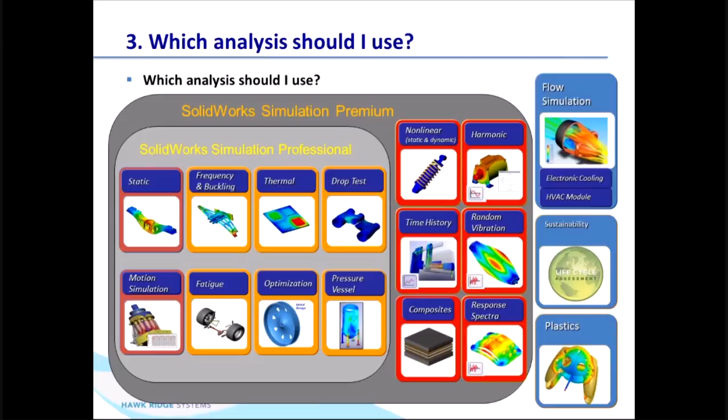You saw Simulation Professional that has all these tools like static and thermal drop test, or we can go into flow simulation and look at CFD. But really, the bottom line is there's a lot of different tools available to you, but oftentimes you're not really sure which analysis you actually want to run, right? Do I want to run a static analysis, maybe a nonlinear analysis? How do I choose? Well, we've already figured out what our end goal is. We've already figured out what outputs we need, if it's stress or displacement.

Should I use a linear versus a nonlinear analysis? Well, looking at the difference between the two, do you have a nonlinear stress strain curve? Is contact a big issue? During your loading condition, is contact going to be a problem? Are you seeing large deflections? Answering these types of questions is going to let you know, do I run a linear analysis or do I need to run a nonlinear analysis? Most oftentimes, you probably want to run both just to see.

If you want to run a nonlinear analysis, what we often suggest is start with a linear analysis first. And then once you've gotten your feet wet with a linear analysis and you've looked at the answers and they look about what you'd expect, then you can move on to a nonlinear analysis.

Maybe you're stuck between, is it static? Is it dynamic? Well, we often ask the question, does the speed of the loading matter? Are you loading it really, really fast where you have these inertial effects involved, or can you assume that you load it really slowly and you don't need to worry about inertial effects? Are you looking for the response of the structure, or are you just looking for that equilibrium final stress or displacement?

For a lot of our electronics cooling customers, they often ask us, should I use our flow tool or should I use the Sim Professional thermal module? That's always a question that gets asked. And what I pose to them is, do you know your convection coefficients? Is the fluid flow around your model going to be of a big concern? If you're not really sure what's happening there, or maybe you don't know the convection coefficients, then maybe you should do a flow analysis. If you do know those, and maybe you're working in an environment, say a vacuum, and there's not really any fluid there, maybe thermal would work better for your case.

So the fourth question that we ask when we're planning an analysis is, what model should I use? And this is a question that I'm surprised not as many customers ask, because it seems like a really simple question, right? What model should I use? Well, it's the model that I designed, the model that's in the real world. That's usually the answer that we get. And oftentimes when we have our CAD model and we've either gotten it from a designer or you are the designer and you're just setting it up for analysis, you designed it with manufacturing in mind. You're going to build your product, and in the CAD world it looks exactly like what it would look like in the real world.

Well, in analysis, oftentimes you don't want to use that full detailed model right off the bat. You're going to run into a lot of headache. It's going to be hard to troubleshoot if you start with all the details and then try to figure out what's going on. Ideally, we'd like to start with a simplified model and then add detail as we go.

We can start relatively simple, pretty simple, and then if that's a little too simple, we can add a little more detail, add some more components if necessary, and then work up, right? So most of you have probably heard of this, start simple, but the question then becomes, do I start with my existing model, my CAD model that I've designed for manufacturing, and simplify it, maybe make a configuration, make a copy of the part, and then get rid of some fillets, get rid of some extra components, some holes, things like that, and whittle it down? Or would it just be easier to create a brand new model from scratch and then just build your simplified model and be done with that?

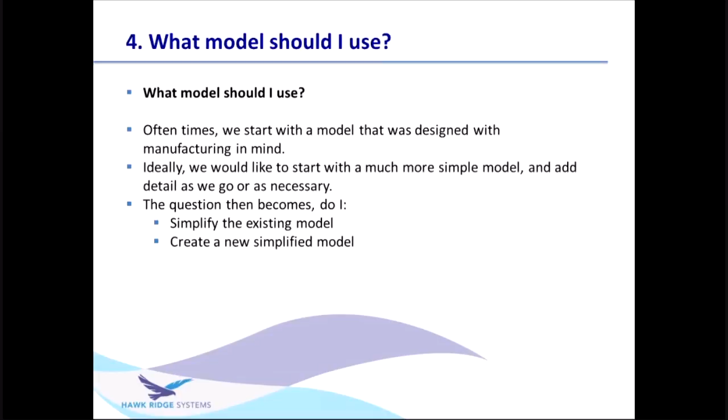So now we've sort of done this a little backwards. We've asked for outputs first, and now we're asking for inputs second. So, for my 5th question, what inputs am I going to need? And it's really good before you even get into the software and start pushing buttons to gather as many inputs as you possibly can. For a lot of different analyses, you're going to want sort of the same inputs. You're going to need material properties, pretty much regardless of what analysis you're going to run. You're going to have some idea of the loading conditions. Is it going to be force or pressure? Is it going to be 200 pounds, 400 pounds, a ton? Is it going to have 50 watts of input, etc.? Those are really good to gather up front before you actually go into the software.

But the other question that you should ask is, how many of these components in my model can I remove? Maybe I can simplify, if I can turn them into fixtures or remote masses, remote loads. It's almost like you're planning your model simplification before you actually simplify your model. The other question that I often forget about, and I have to make it a point to remember to ask, is, can I leverage symmetry? Symmetry is often a tool that we forget to use because in real life, it's not cut in half, or it's not cut into a quarter or an eighth pie, right? But in the software, you can really cut down on the solve time, the meshing time, if you realize that, hey, my model's actually symmetric, the loading conditions are symmetric, maybe I could take advantage of half symmetry, quarter symmetry, and make a note of that before you actually go into the software, because most likely your manufacturing model is not half of your product or a quarter of your product. You might need to make a configuration that is a half model or quarter model.

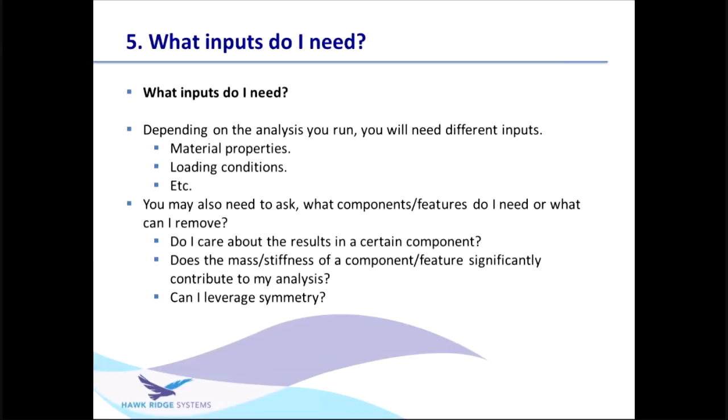So, the 6th question that we ask, and it's something in services that we actually write down in our statement of work because it's really important to us, is what are the assumptions that we're going to make? What's the big deal with assumptions? Well, understanding the assumptions that you make in an analysis is really going to help you understand the results that you get. Now, every analysis is going to have some sort of assumption. Even if you have all of the details in your model, the loading conditions, the boundary conditions, they're going to have some sort of assumption built in.

Some generic assumptions that we often come across: manufacturing defects aren't considered. So what are we saying here? We're saying that our assumption is all the metals, all the plastics are perfectly made. There's no cracks in them, no manufacturing cracks. All the welds that may be holding the thing together are perfect welds. The welder had a really good day at work and he didn't mess up anything. All of them are the correct size. So we're not even considering manufacturing defects.

One of the things, if we run a thermal analysis with our thermal module, is we say that the convection coefficient that we specify is going to be uniform across the entire face that we've specified it on. Now, in real life, that might not be real, right? In real life, the convection coefficient may be different at one end of the face than it is at the other. And for this assumption, you have to understand that assumption, so when you get the results back from your analysis, you can understand the results that come out of it.

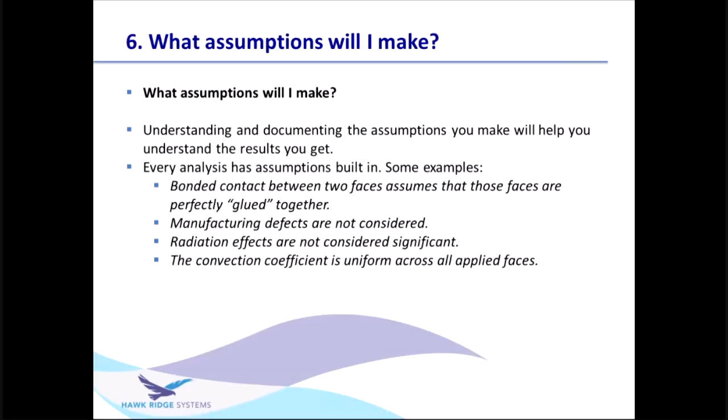Why is that? If you give those results to your boss, you give it to your customer, and they come back and ask you that question, well, if you understand the assumption that, hey, I put this material property in, it's not the exact material that we used, and the material that we use is actually stiffer than what's happening in real life, that's why we're seeing the displacements that we see. That's why we're seeing the stresses that we see. So again, understanding the assumptions that you're making is really going to help you understand the results that you get out of the software.

So the seventh question that we ask is, what kind of accuracy am I looking for? We ask this question and we almost always get this answer. I want it to be as accurate as possible, no questions asked, right? I want it out to 5, 6 decimal places. It's got to match what the real world gives me. This isn't always the most realistic way to look at an analysis, just from a time perspective even.

And in services, when we look at accuracy, we look at it with sort of two ends of the spectrum. We have matching exact values with the real world, and then we look at trends, which is sort of the other side of the spectrum. Let me explain that.

So, from one end of the spectrum, matching exact results requires a lot more detail. If you want to exactly match what you're seeing in the real world, you're going to have to include more details. You're going to have less assumptions, so you can't have as many assumptions as you may like. And all of these things are really going to equal more computational time. Not even from a solving standpoint, but from a geometry simplification standpoint, a troubleshooting standpoint perhaps, it's going to take more time.

The idea behind looking at trends is you're looking for a reasonable value. It doesn't have to be exact out to 3 decimal places, but it's a good, reasonable value that you get for a result. But the idea behind it is you want to take that model and then make a design change to it. And really what you're interested in is seeing if that design change helped your design or harmed your design, right? And so you don't really care so much about the exact numbers as much as, if I make this change, is it going to help or hurt my design?

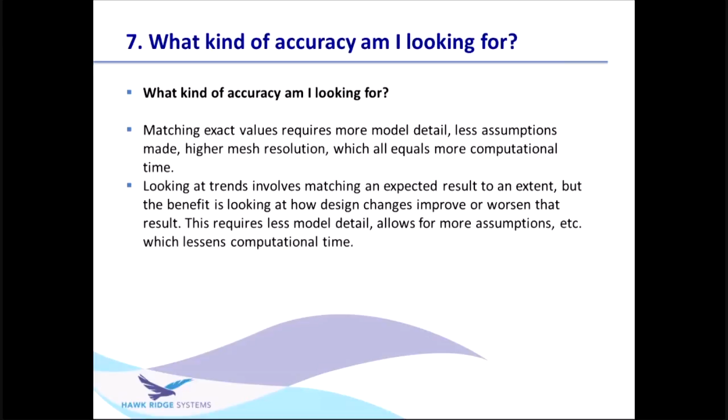So the last question to frame your project and really get a feel for where your project is going is, how do I know my results are going to be correct? I've talked to our tech support team. They get this question a lot. We get this question a lot. How do I know it's correct?

Well, there's really two things to blame if you get a result back that you don't expect or you think is wrong. One, the software is acting up. It's not reporting the numbers back correctly. There's something wrong with the software or the solver or the method it's using. The other thing to blame would be the input or the geometry, right? Everyone's heard of the term garbage in, garbage out, right?

So, unfortunately for our customers, what we've found is that 98, 99% of the time, the software actually isn't to blame. It's something about the input not matching what you see in real life. We at Hawk Ridge and also SOLIDWORKS, we have validation tools, NAFEMS validation tools,

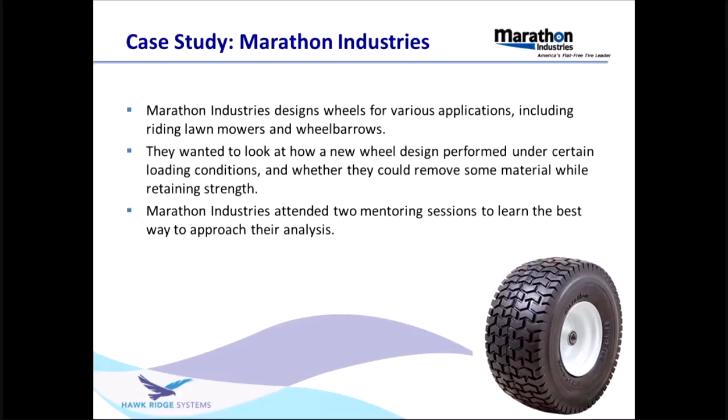So Marathon came to us with this problem, and they had SOLIDWORKS Simulation, and they wanted to know, hey, we want to solve this problem, but we want you, Hawk Ridge, to teach us how to do it. So they attended 2 of our mentoring sessions, and we discussed how to approach their analysis. So just like what I did with Marathon, I'm going to walk through with you guys real quick and answer those 8 questions with their analysis.

So what was their end goal? Well, plain and simple, with an existing design that they had, we want to use less material, save on a little bit of material, but keep the strength of their wheel, right?

Again, they fulfill large orders of wheels, so any weight savings that they do is going to save them a lot in the long run. All right? Okay, well, what outputs are they going to need?

Well, they're primarily interested in high stress, or in the other case, low stress. Really, they're looking to remove material, and so what they wanted to do was look at their wheel and see, okay, wherever the areas that don't see a lot of stress, where maybe the load path isn't located, let's see if we can remove some material in those areas and see if that really altered our stress at all, altered our factor of safety. And if it didn't, hey, we can remove some material there, we'll be perfectly fine.

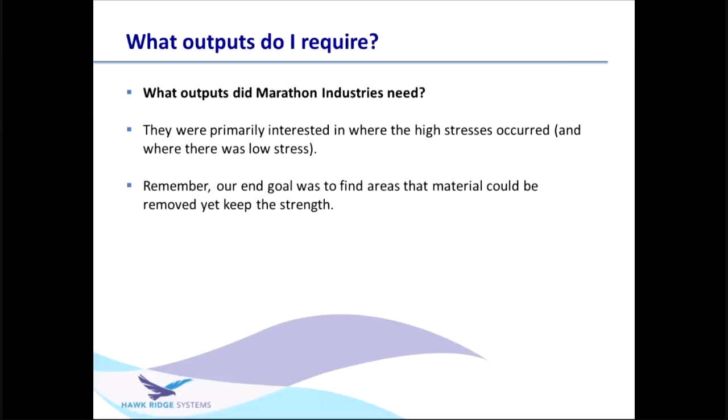So, then they said, okay, well, what analysis are we going to need? Well, we looked at their problem and we said, what are our assumptions? Can we say the force could be applied slowly? They said, yeah, we can assume that. Is your plastic material, are we going to yield it? Is it going to behave in some exotic fashion? They're like, no, we're going to say it's going to behave linearly. And really what they were after was the stresses, and also they wanted to see what kind of displacement or deformation it did under the loading conditions.

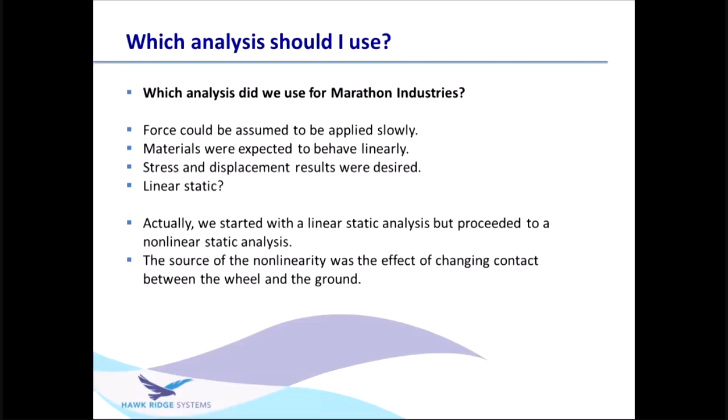So, with these ideas in mind, what would you guys think? Static, dynamic, probably not a flow analysis, right? So our first thought was, okay, what about a linear static analysis? Well, what we ended up doing was we actually started with a linear static analysis, and then we went to a nonlinear analysis. And the reason for that is they wanted to test their wheel acting on the ground, and see what happens as the wheel deforms while it's in contact with the ground. And so that's a nonlinearity of this changing of ground contact between the wheel and the ground I wanted to look at. And so we said, okay, well, that's going to be a nonlinear problem.

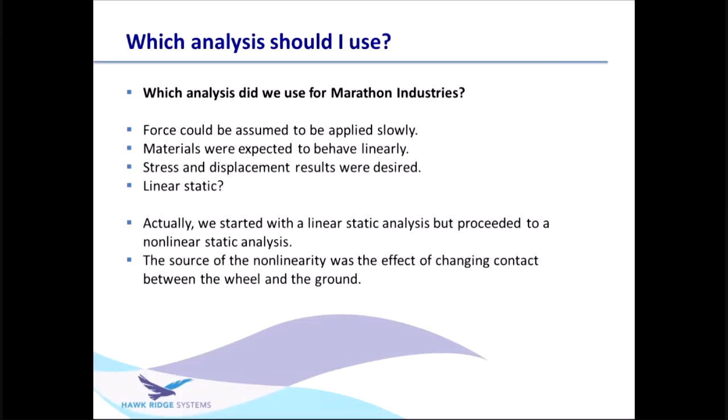But since we're doing 2 mentoring sessions, let's start with a linear analysis. Let's get our feet wet, make sure we're good with a linear analysis, and then we'll proceed to a nonlinear analysis, right? So what model did we end up using? Well, before I actually get into why, let's take a look at their model and see what I saw.

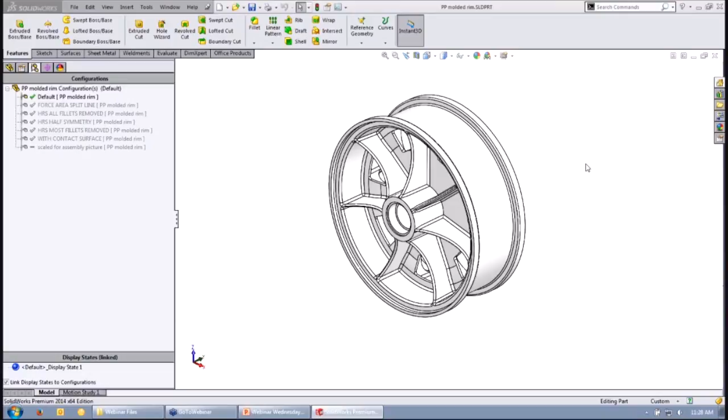So I'm going to bring up SOLIDWORKS here, and this is their wheel model that they gave us. This is the non-simplified model they sent us. It's got all the fillets in it and all the cuts. We look at it and we say, okay, it's got some detail in it. But in looking at this model, the first thing I thought of was, should we use solid elements or should we use shell elements? And again, a little background, shell elements are really good for thin-walled structures that have uniform thickness.

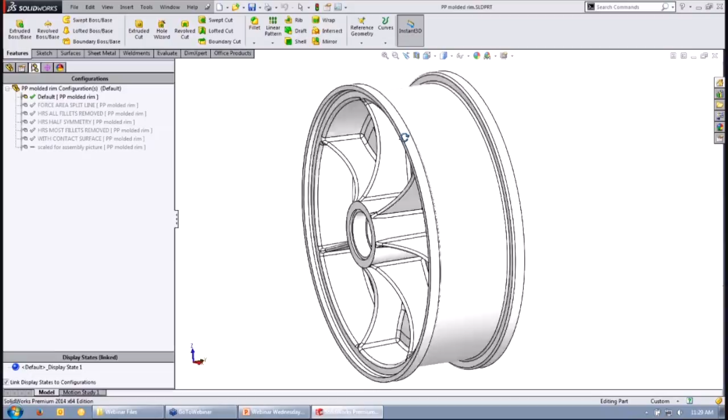And in order to use shell elements, we either need to make the component into a sheet metal component, or we need to make some surfaces that we can use as our shell faces. Those are 2 typical ways that we can turn this into a shell problem. But in looking at this, it's pretty complex. If we look at some of the wall thicknesses, they're not all uniform, especially in this area. So we said, okay, well, let's go with solid elements to start and see how far we can get with solid elements.

And because we decided to go with solid elements and there weren't too many features that we needed to remove, we decided, hey, let's go with the customer's model. We didn't have to start from scratch and build this up. Now, if we did use a shell type model for this analysis, I might second guess that and I might want to build it from scratch. But we ended up using their model anyway.

So what were the inputs that they needed? Well, they were looking at a 200-pound load, and they wanted to look at primarily the wheel. There's a tire associated with this wheel, but they didn't really care so much about the tire.

Their main concern was the plastic wheel itself. And they told us that the wheel, there's a tire on it, and the wheel is attached to an axle by 2 bearings. There's 2 bearings on there. But we really don't care about the axle. We really don't care about the bearings or the tire. So how would we set this up?

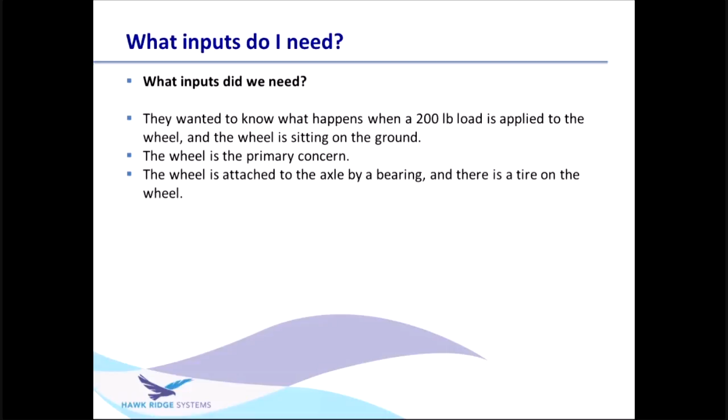Well, we take all that information and we try to envision, okay, how are we going to do this in terms of fixtures and connections and loads? Well, because they told us they didn't really care so much about the tire, the bearing or the axle, we said, okay, we can remove those. We can save all of our meshing time by removing those, and we can add fixtures to it. So what we did was we added a bearing load to represent the force where the axle meets the wheel.

And for the ground, we said, well, we're assuming that the ground is much more rigid than the wheel was. So we made a surface and we said, hey, this is going to be a perfectly rigid surface. That was a good assumption. And the other nice thing is because this wheel, the way it was oriented, was symmetric about the right plane, we decided to cut the model in half and use symmetry about the right plane.

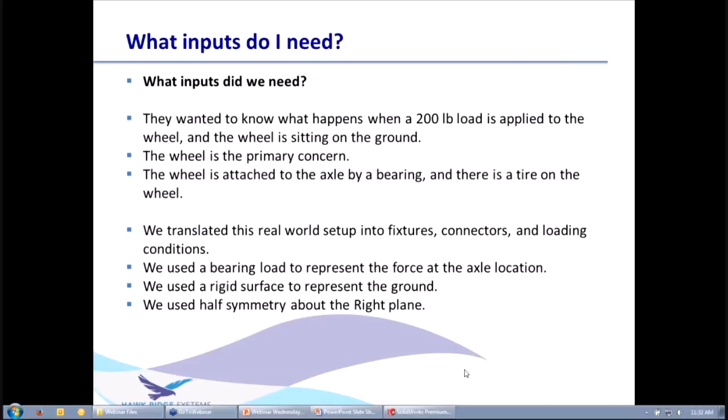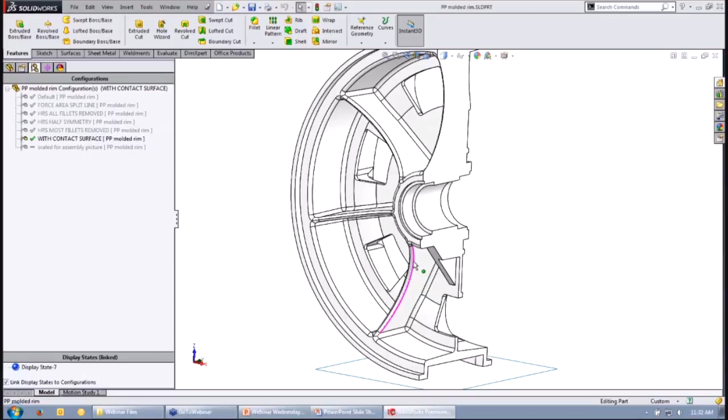So just to show you guys what we ended up using, this was the model that they gave us right off the bat, and this was what we ended up using for our analysis. So we cut it in half about the right plane, and we added, see that little surface down at the bottom? This is actually what we ended up analyzing. We simplified it a little bit. We still kept some of the fillets in there because we found some of these fillets were needed structurally. But we removed as much cosmetic as we could and added some symmetry.

So what are some of the assumptions that we made with this case study? Well, we said that this wheel is going to experience some small deflection. Okay, so we're not saying that this thing is going to compress 50%. We said that the wheel material is going to behave in a linear elastic fashion. It's not some exotic material that we have to worry about. And the way we're loading it, we don't have to worry about inertial effects, right?

So to give you an example, if we were going to try and simulate someone taking this hand truck that has these wheels and dropping it off of the back of a pickup truck or maybe off of a curb onto the ground, that's going to represent sort of a sudden impact instead of a nice slow loading condition. In that case, we wouldn't be running a static analysis. We'd be looking more at a dynamic type of analysis. But for this case, we're just going to load it slowly with 200 pounds.

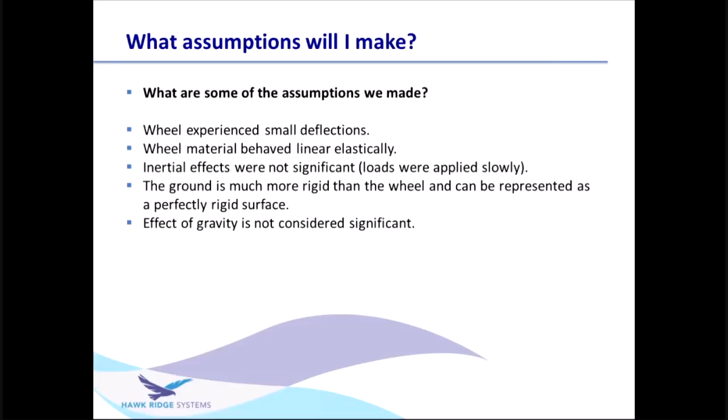We also made the assumption that the ground that we had is much more rigid than the wheels, so we could just say, hey, it's a perfectly rigid surface, and that's why if you looked at our model, it just had a perfectly rigid surface there. And we didn't worry about gravity. We said, this model's small enough, and gravity effects compared to the rest of the loading conditions are not going to be considered significant. So just a few of the assumptions that we made and we actually documented for Marathon.

So what kind of accuracy did we end up looking at? Well, for this one, remember, we can either look at one end of the spectrum and look at matching exact results, or we can look at trends. And for Marathon, what we did was we actually looked at the trends. It sort of fell closer to the trend side of the spectrum.

Because remember, what was our end goal? Our end goal was to remove material and see if we could keep that strength there, right? So it doesn't really matter what the exact number is, as long as if we remove material, our stress values, our factor of safety doesn't change very much, and that's really looking more at trends.

So I asked Marathon when we got their model, we can run all of these analyses, but how are you guys going to know that what I give you or what I show you is going to be even ballpark what you expect?

Well, the nice thing, we actually got the timing right, was they had told us, we have similar wheels out in the field, and so we have an idea what's going to happen with our wheel. They told us they typically over-design their wheels because they haven't in the past used analysis tools. They've simply said, okay, we'll just throw a whole bunch of plastic at it, and it's not going to fail. And they've told us they haven't had any field failures with their plastic wheels.